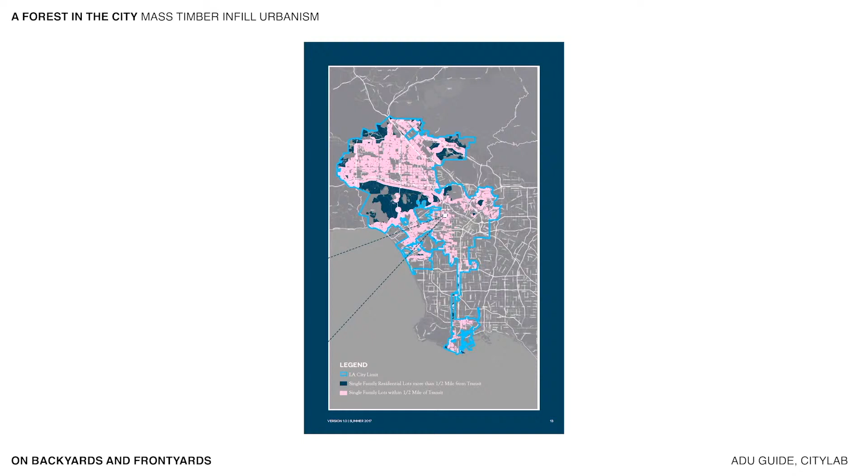One answer has already been extensively explored throughout Los Angeles: the conversion of what was once garage or shed space to accessory dwelling units, now legal throughout California. These backyard homes easily densify and reduce wasted interior block space.

Another strategy involves returning to Dolores Hayden's 1980s collectivization of the suburban block, in which backyards are surrendered as block-wide common space for playing, gardening, and socializing in an attempt to flatten hierarchies and alleviate suburban ennui. Perhaps where Hayden's plan falls short is in the co-opting of parts of existing homes, rather than creating new central structures.

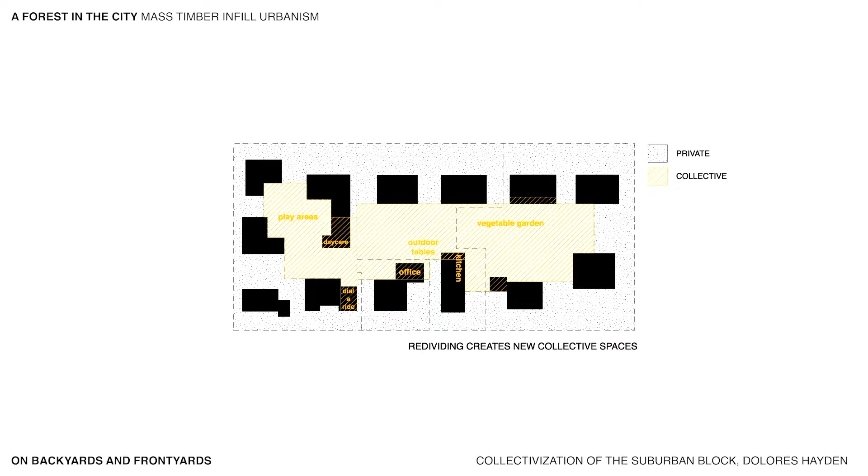Taking stock of every square meter of land within the site validates this interest in backyards and found spaces. The area is relatively dense by Los Angeles' standards, and nearly half consists of low-rise residential buildings. Yet front, back, and side yards, driveways, and the omnipresent parking lot all present ways to rethink moving through and living in this sprawling city.

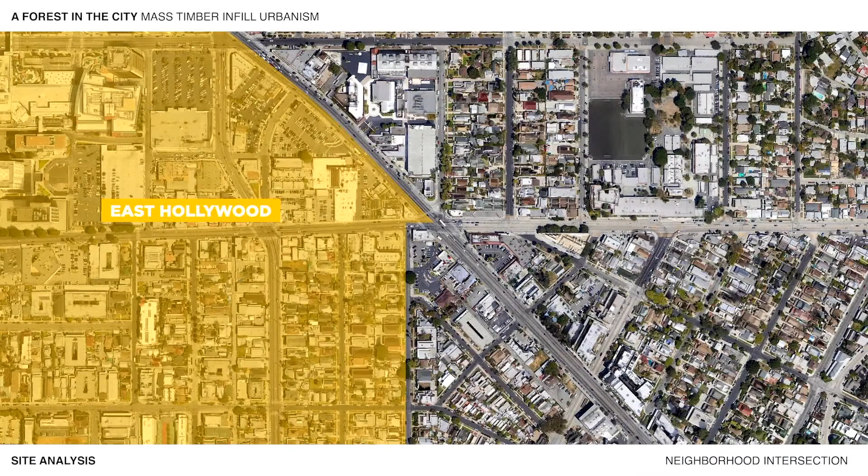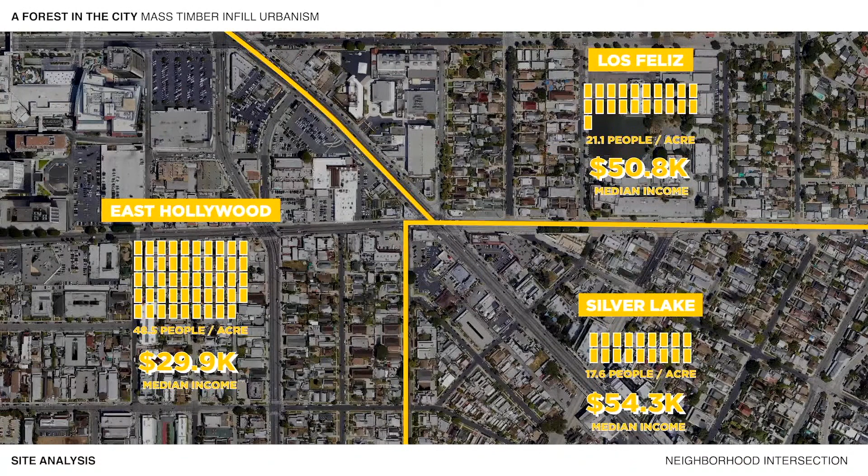This inquiry is centered at the intersection of three neighborhoods: East Hollywood, Silver Lake, and Los Feliz. These three distinctive areas present a dichotomy of lifestyle and domesticity in LA. Predominantly white, affluent residents in Silver Lake and Los Feliz have become the stereotype of the American hipster. East Hollywood, the third densest neighborhood in Los Angeles, is home to young, working-class families. Predominantly Latino and low-income, East Hollywood's density in an otherwise familiarly low-rise neighborhood comes at the cost of overcrowding. A reminder that many of the units coming on market today are not only unaffordable, but too small for families.

The area is not only the intersection of two lifestyles, but also of Los Angeles' two grids: the Spanish colonial Ord grid, oriented to the sun, and the American checkerboard Jeffersonian grid, which slashes east to west to form LA's familiar system of streets and boulevards. This intersection provides unusual view corridors, producing an almost diorama-like urban layering effect. Common moments of lifting, often as casual as a car wash or motel hallway, frame these layered views, creating illusions of unlikely adjacencies between commercial and residential and collapsed typologies.

The project is situated adjacent to the primary commercial corridors along Sunset and Fountain, at the center of the study area. Although this intervention is site-specific, the concept speaks to exemplary conditions for addressing increased density throughout the LA area.

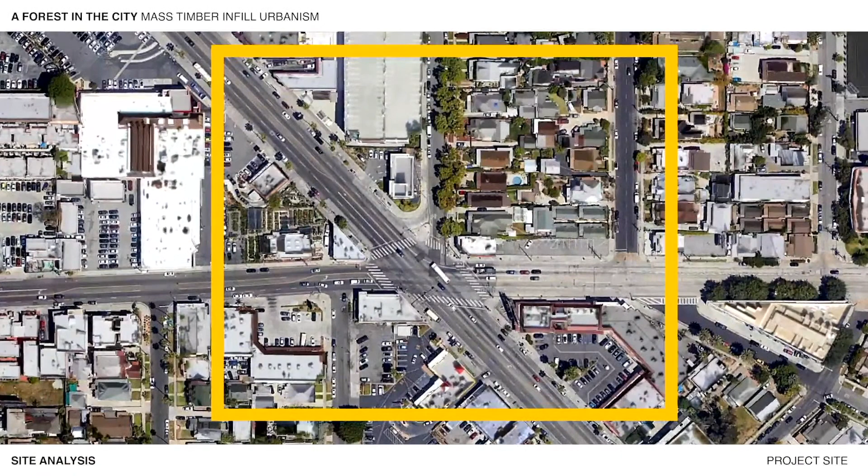Here, a linear strip of surface parking along Fountain anchors further development into the block. This necessitates taking over the backyards of 4 single-family homes on the western side of the block to link 2 linear spaces together for an infill strategy.

The project proposes a 12-story residential building on this site that, despite its narrow footprint, offers a vision of increased density able to accommodate different residential experiences representative of its diverse context. At 11,100 square meters and with an FAR of 11, the building challenges current zoning limitations.

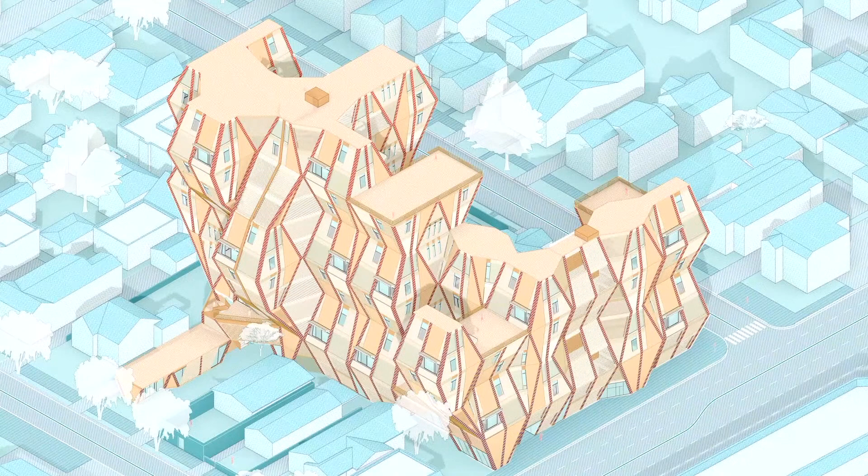This perspective shows the building from Fountain Avenue looking east, and showcases the use of heavy timber framing augmented by wood infill panels and louvers throughout the facade. Exterior expression takes inspiration from the German tradition of Fachwerk. Directionality, offsets, and angles inform the facade as they do the massing.

Programmatically, the building operates in 2 sections. The street-lining front bar houses a series of split-level co-living clusters, while the interior bar contains a more typical mix of 1 to 3 bedroom apartment units, oriented around open-air cores and shared space.

At the ground floor, the project proposes a completely open and public interface connecting the neighborhood to a small public library and exhibition space on the 2nd and 3rd floors.

Beginning from a consideration of growing and branching, the massing and structural logic follows a trapezoidal form, which flips, joins, and merges along set seams.

These organizations provide a mass timber structural logic that draws from the strength of diagonal vertical members bolstered by deep girders, eliminating the need for contiguous central columns.

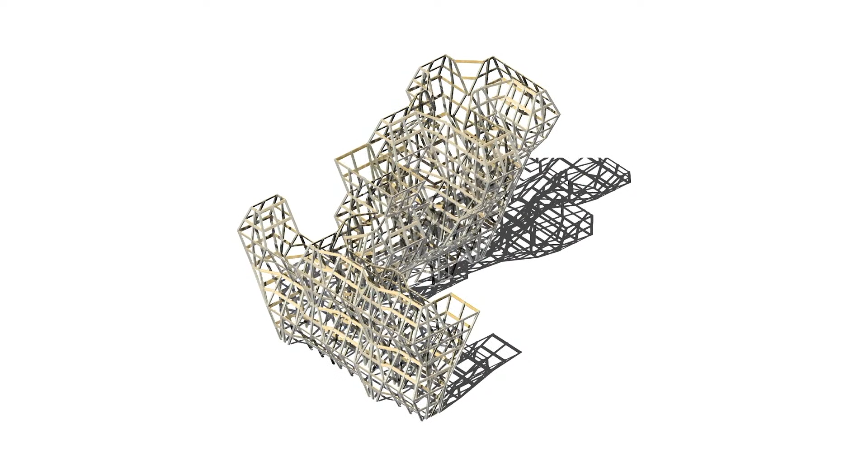CLT floor panels provide further stiffness, and tying back to the CLT cores enables much of the branching and growing, allowing the slender base to support a structure that rises, rather than looms, above its 1 to 2 story neighbors.

This footprint and structure provides a framework to interrogate ways of living. As mentioned in the program diagram, the street-facing bar of the building is home to co-living clusters.

Here, one module houses a pair of dense, split-level clusters. Each is composed of a private, parceled sleep floor connected to an open, social living floor.

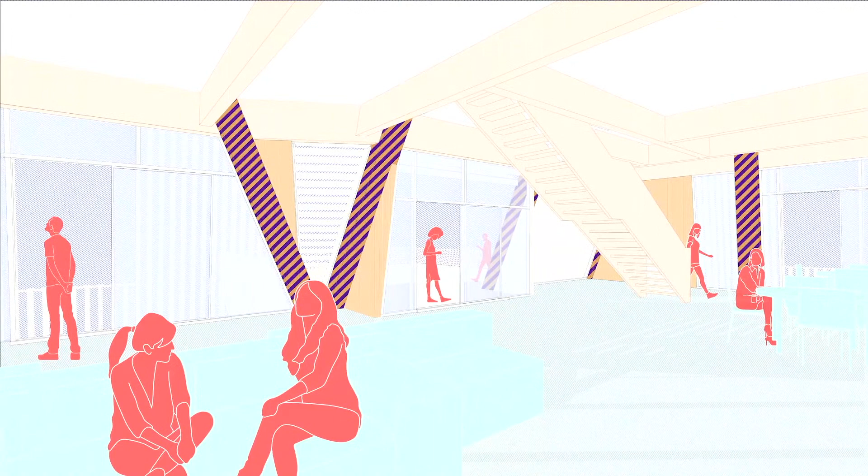Notably, the project does not work with unit minimums. These spaces are designed for family, gathering, and flexibility, thinking aspirationally about the chance for emergence of new collectivized systems of economy and lifestyle.

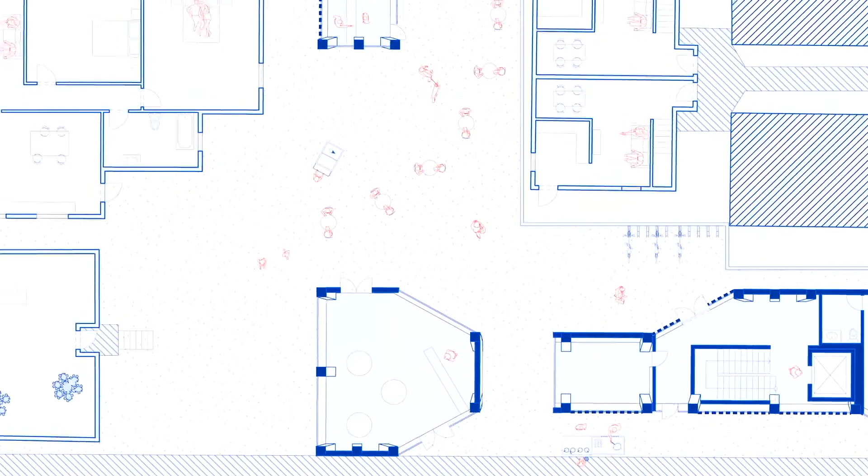This provocation entails a radical shift in notions of sovereignty over urban space. Collectivity and shared experiences are presented as a means of dismantling the unwavering individualism that contemporary urban environments tend to embody and protect.

The project creates a public throughway from Fountain Avenue to Hoover Street, which frames space for 2 residential lobbies, piecemeal retail spaces, and an 80 square meter ground floor extension of the public library at the northern edge of the site.

The proposition of increased urban density put forth by the project as a whole begins in earnest at the ground floor. With only minimal encroachment into existing single-family lots, the overall use of space is intensified for both public and private realms. Communal and open spaces flow up through the building.

A 1,300 square meter library and exhibition space span the 2nd and 3rd floors, while shared open-air circulation continues to serve the various residence types above.

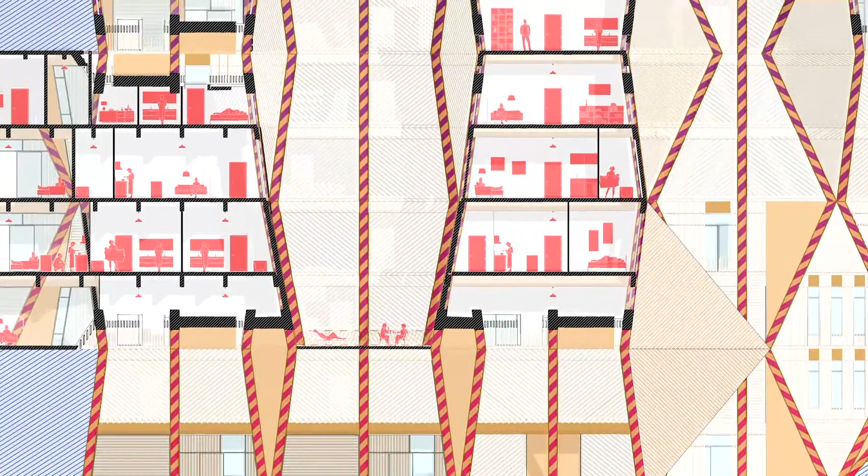The design offers both internal exchanges as well as moments of encounter between the building and its context. Public entrances to the site are characterized by the interface between low-rise residential context and the proposed design, as sharp transitions in height and program are moderated by a near ubiquity of open-air public space.

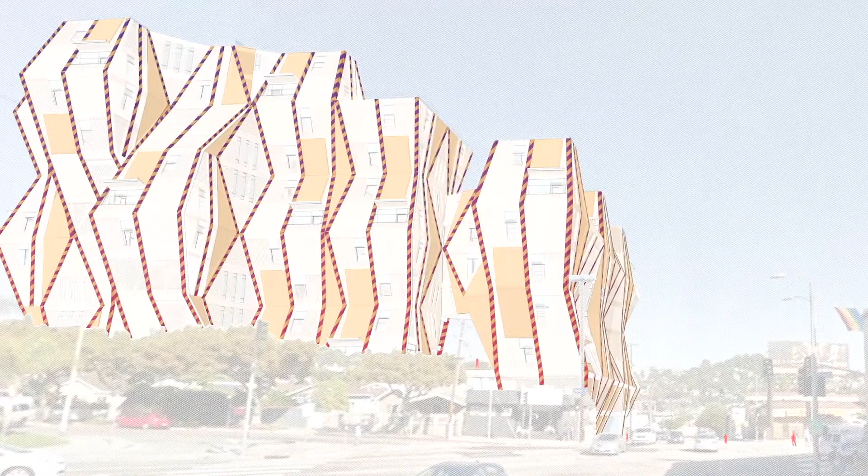In an already decentralized Los Angeles, density can no longer be relegated to certain areas of the city. This design offers an approach to high-rise density mixed with quintessential LA housing typologies, and suggests that we can move forward without losing our past.

Mass timber offers new opportunities for sustainable density, both in construction and living. In the face of a housing crisis and growing anti-development sentiment, this project pushes the limits of mass timber construction to reject calls for modest density, and posits extremes in its approach to density as in its approach to living together.

What I learned from this studio is that what triggers me most is directing the views and experiences of people while moving—how to excite and surprise them, how to make the rides fun.

The central idea for me to engage in mobility is to weld the discontinuity during each transit and to make everything straightforward, including experience. Every time I start a design, I try to better organize the pedestrians and the different size vehicles and try to provide both walkers and drivers an efficient and enjoyable experience.

What I learned this year is to imagine the circulation pattern of how people and things can move interactively in buildings or urban areas.

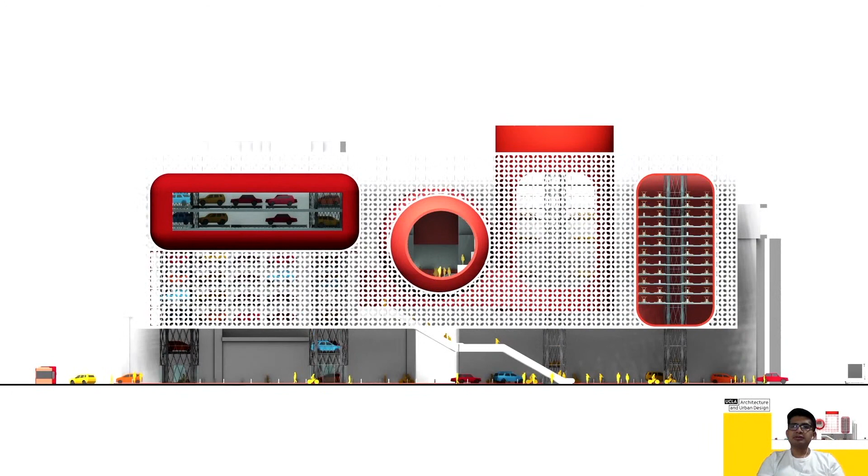This project proposes that the vehicle comes to you instead of you looking for them. The hub is expressed as a vending machine. Vehicles are stacked on the top and delivered to people with elevators on the ground level.

The vertical stacking of vehicles becomes a landmark. The movement of bikes, cars, and scooters on the elevator makes the facade be in constant motion.

The machine is divided into volumes for vehicle storage. They store cars, bicycles, scooters, and one volume in the center is a giant 7-Eleven.

This simulation is shown at rush hour. The vertical stacking liberates the ground floor. For that, the ground floor becomes a grab-and-go place. It is a place for people to grab and drop a vehicle and continue to their destination.

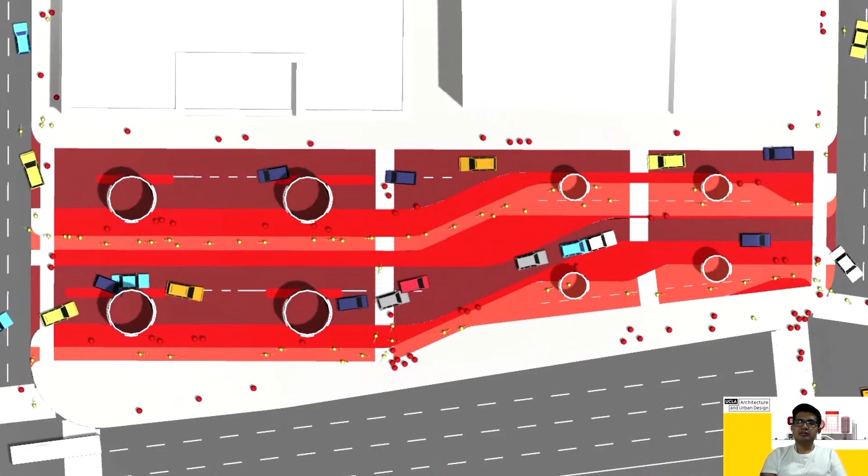The liberation of the ground allows for people to walk freely and for the project to be better connected to the city.

I believe that this project is possible to function today since we can order a vehicle from our phone ahead of time.

This is a shopping and transit experience placed on a busy traffic junction right over the Noho train station.

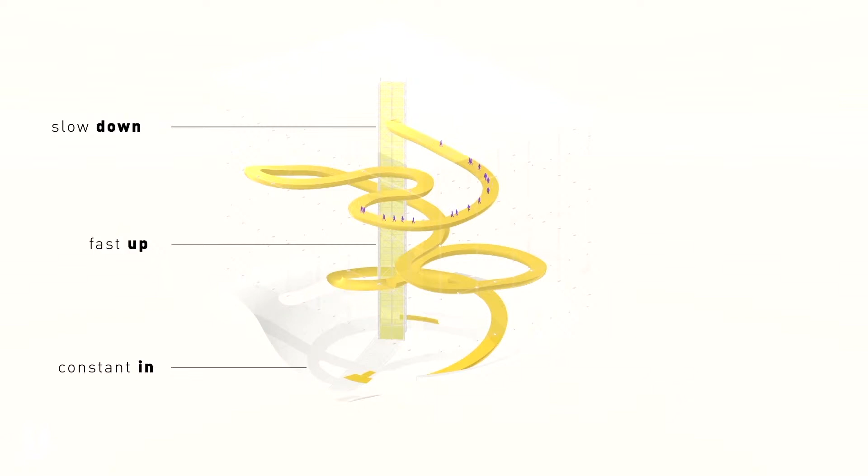The main idea of building circulation is based on a simple logic of launch and slide, replicating a skiing experience with one point of constant flow on the street level, a vertical emitter to the top, and a slow sliding path back to the bottom. This is not merely a movement diagram, but a starting point for creating four distinct spatial experiences.

The first one is that of finding yourself inside a mobility vessel. This bowl-shaped entrance works first like an attraction point and then as a mixer of all the different means of transportation flowing in from the city, penetrating and blending inside it.

Here we will see the trucks that supply the market's back of house that runs on the top of the vessel, cars picking and dropping, grabbing and going, and all the pedestrians and micromobility coming into the site.

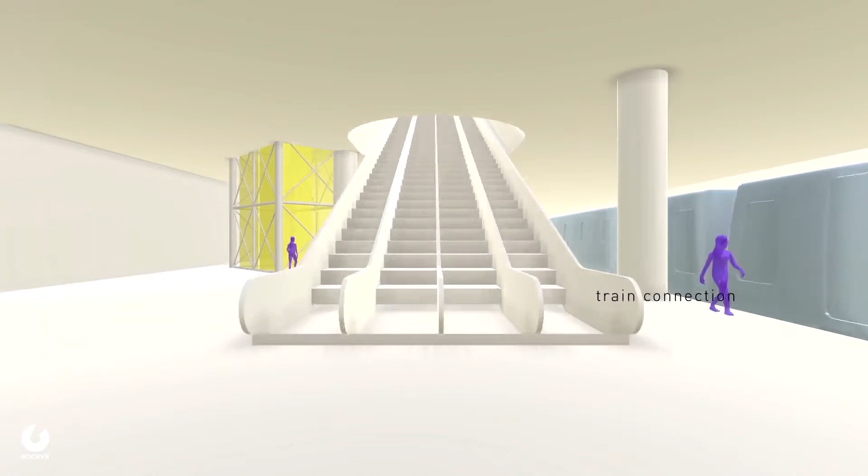The experience starts from the bottom of the bowl, up from the train station, straight into the grab-and-go market, and into the core of the bowl.

Where as you bike or walk or drive or skate, you can always look up and see a floating market hanging over your head, right before you find yourself on the top of the vessel and on an elevated city ground that works as a skate park.

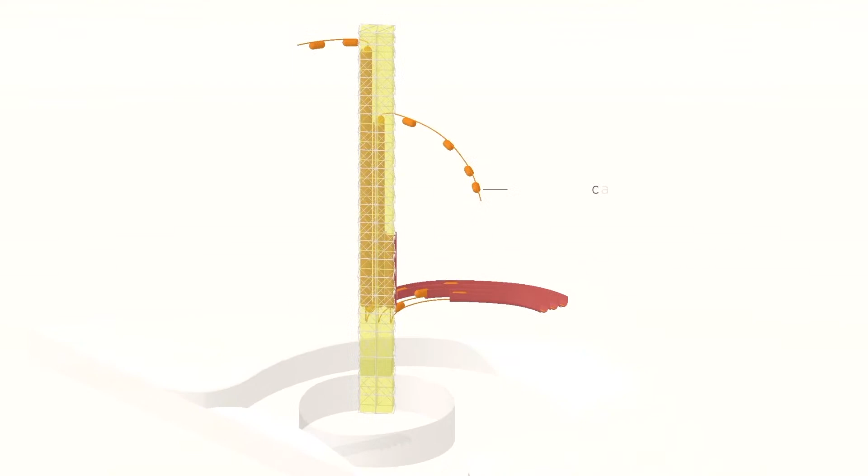Then comes the vertical movement, a binary system for goods and people speeding up to the market, a combination of all views as cutting through and directing at all the different parts of the building all the way to the top.

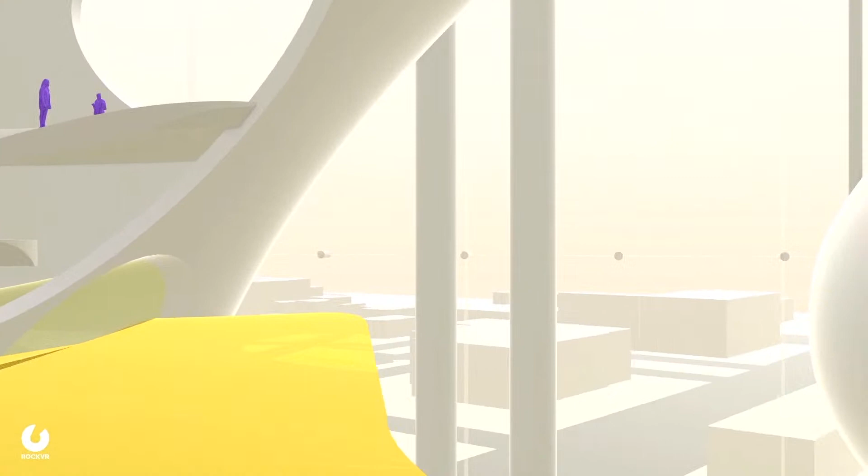From here starts the shopping, twisting and turning on a continuous sliding route to the bottom. And what first looks like an inscription of pedestrian courses on a snake path actually turns into a navigating experience of alternating images, where the 3D space, wide or narrow, introvert or extrovert, sets a multi-speed journey for the visitor.

And now into the shops. Those blobby floating masses hanging over the vessel are actually three different stores sharing a common logic of open planes on a sequence of floors melting one into the other. Here, the vast openings make the views from store to store a constantly interactive environment.

All those experiences, movements, and views will come to be combined on our version of a transit market, one in steady connection and transaction with the city around it.

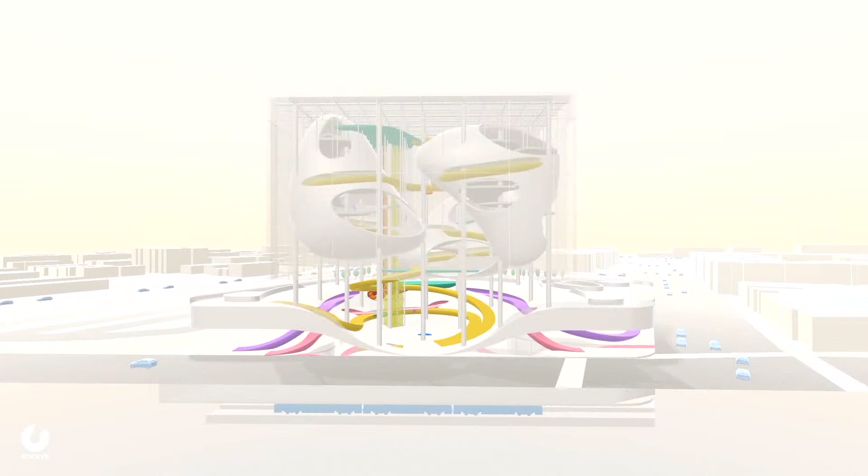This is the simulation of Karnak, and what we learn is that we can use columns to filter different size vehicles. Next is the plan view of the whole market, where we can see buses, Ubers, and different kinds of vehicles going through the market. Next is the simulation of how cars, micro vehicles, and Ubers move through the site.

This is the precedent of our market. It has continuous space horizontally and creates a rapid changing experience vertically. We believe such an experience would be great for a market, so in our proposal we translate this 2D plan into a 3-dimensional market space.

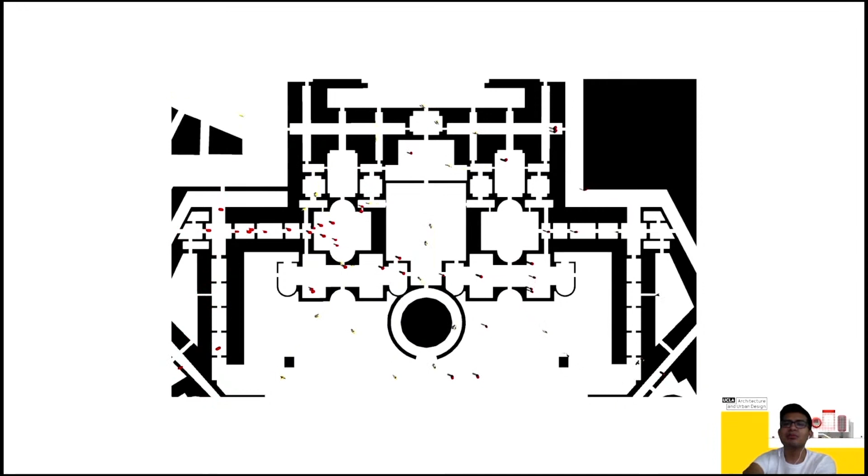We grab elements from Piranesi's Campo Marzio, such as courtyards, enfilades, and hallways, to design the Campo Marzio village. In Campo Marzio village, people move from courtyard to courtyard. Pedestrians and light mobility are allowed, with pedestrians moving through the enfilade spaces and light mobility moving through the hallways.

In this project, people experience spaces in four ways: in the 13th century BC, visit Karnak Grab and Go; in the 20th century, La Villette Market; in the 18th century, Campo Marzio Village; and in the 21st century, the Mobility Highway, which wraps around and becomes the connection between the spaces.

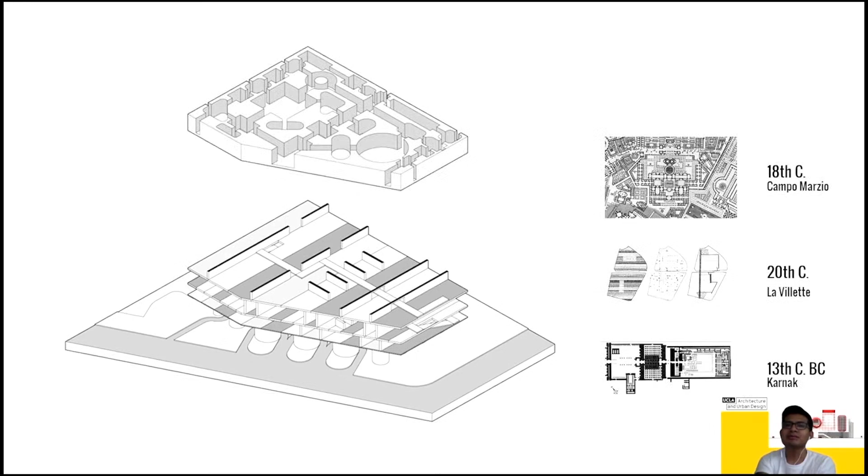In this video, we'll take a tour of this building. The Karnak Grab and Go is on the ground floor. It works as a sponge, attracting people from buses, cars, micromobilities, and the subway train. We use different columns to define the space for different kinds of mobilities.

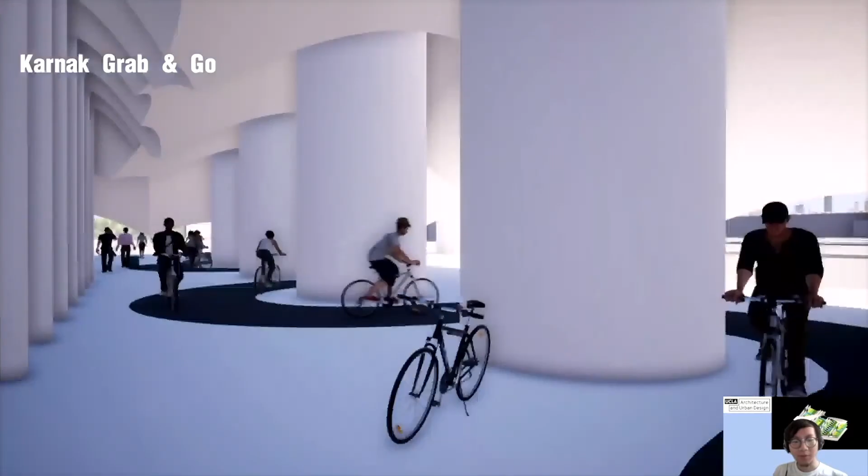People go up by the mobility highway. It is the connector of the three markets in terms of form and circulation.

Now we move to the La Village market. Along the short side direction, each store is a unique, complete, and independent shopping area, but you can keep jumping from one brand's world to another quickly through the bike lane.

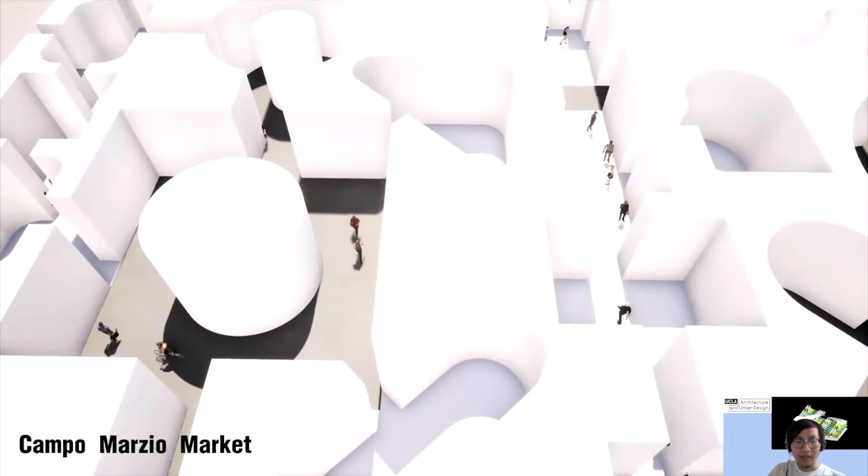Now we are going up to the Campo Marzio market. It is like a shopping village. There is a path for bicycles, and the other paths are for pedestrians only.

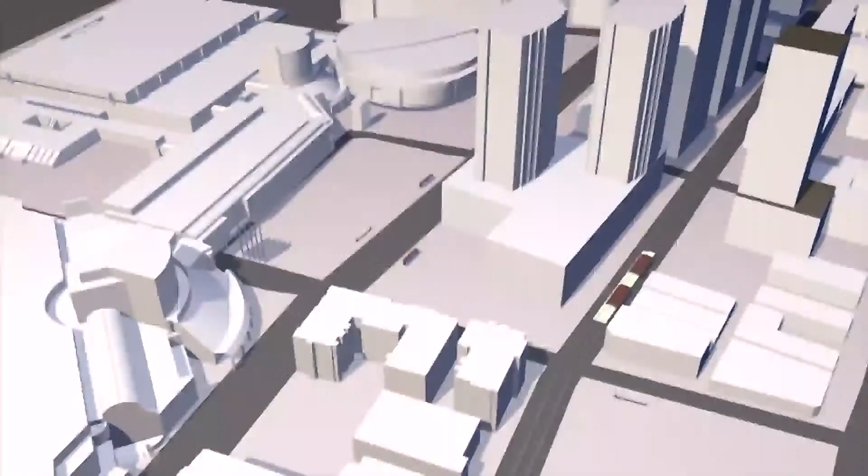The site is located in the South Park neighborhood of downtown Los Angeles. There are many attractions here, such as the Staples Center and Convention Center. It has many different modes of mobility, like the Pico Station, bike sharing, scooters, and bus stops.

There is an aerial platform and vertical connections to the ground. There is a family of vertical connections that serve as transportation and parking places.

This project seems like the High Line Park in New York. This Skywalk doesn't just work on its own to encourage people to use micro-mobility, but it could also activate the grade-separated crossings in Los Angeles built in the 70s and 80s.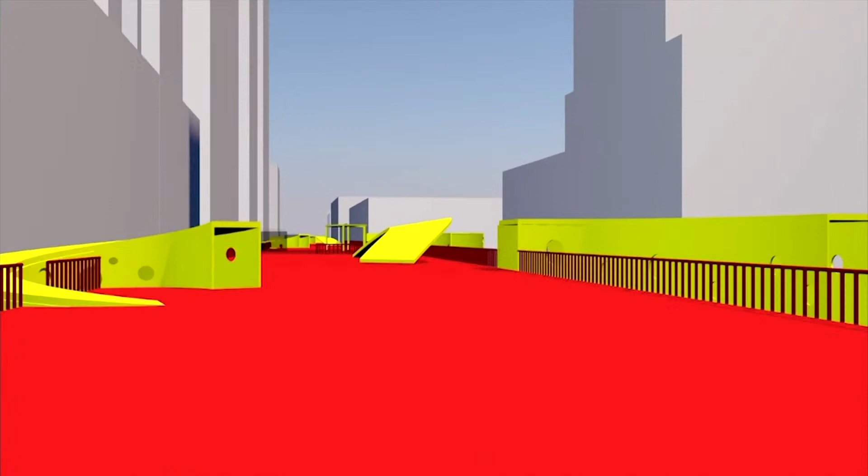This simulation shows how this Skywalk works during a whole day. This aero platform connects with different mobility and attractions, so that people can reach their destination directly or transfer to other places with the help of micro-mobility, solving the last one or two miles traffic problem.

It puts different mobility on the same surface. What we could see is a spectacle of people doing things on the surface and spectators watching it at the same time.

The studio between architecture takes as its main concern the capacity of the section to move beyond the serial stack, and instead to develop complex spatial propositions for nesting together a parking garage and a gym.

In his article, Successive Architecture, Preston Scott Cohen writes: 'Gridiron urbanization led to what is still to this day the most pervasive governing spatial principle of architecture, vertical succession, the unartistically considered, non-hierarchical piling of discrete horizontal slabs of space, one atop the other. Vertical succession relegates the architect's role to designing facades and interior surfaces.'

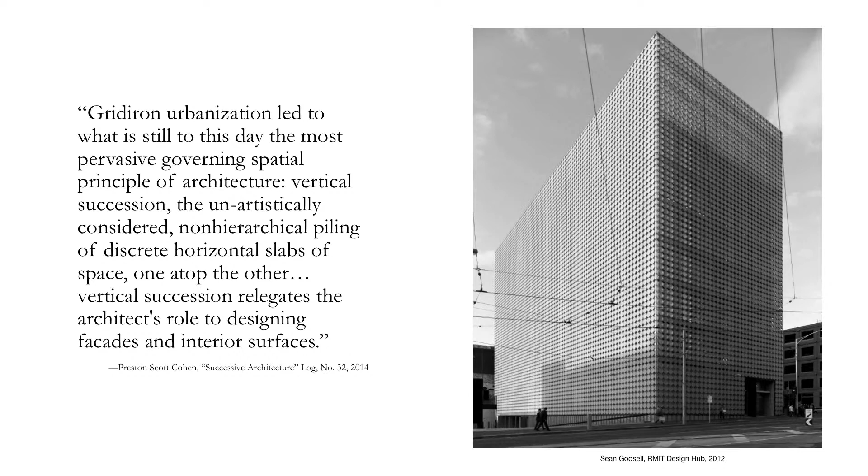This dissolution of sectional hierarchy and the subsequent relegation of architecture to tinkering at the edges points to a series of problems that are at the heart of this first-year core studio—namely, what can a section do, and what, if any, is its relationship to the elevation?

In this studio, we look to the section as a place of great intensity that could dislodge expected relations between parts, as well as expose and choreograph alternative sequences and organizations of view and action.

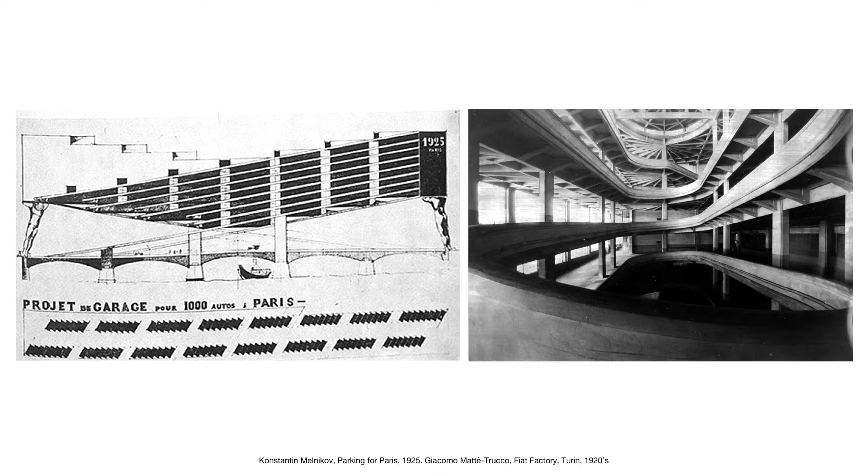With this in mind, we focused on the section's generative orientation in architecture, rather than strictly seeing it as a post facto analytical instrument. In an effort to immediately challenge and interrogate the limitations of the stack, we began the studio by engaging a parking garage as an incitement for the development of a sectionally charged proposal, paying particular attention to 4 parking types: straight ramps, ramp floors, split level, and helical ramps.

While at first glance the organization and circulation of cars in a parking garage may seem a banal and burdensome coordination of metrics, turning radii, numerical capacity, structural spacing, the arrangement of cars offers an immediate engagement with sectional motivations. In this sense, the parking garage is understood as a kind of sectional ready-made, preloaded with stubborn logics and formal resistance, against which an architectural proposition could be forwarded.

In lieu of a precedent, we endeavored to understand and tame the highly specialized workings of parking garage structures and their discrete typologies, finding that once the basic parameters of parking were understood, a great range of possibilities became apparent in the choreography of ramps, slabs, stacks, splits, and spirals.

At a large scale, parking provides a coarse sectional strategy that dislodges the serial flat plane as a given datum of a building while remaining adherent to the necessities of movement and use. It is these qualities of the parking garage, its prescriptive limitations as well as its potential exuberances, that we imagined as the fraught datum against which a second set of concerns might take root.

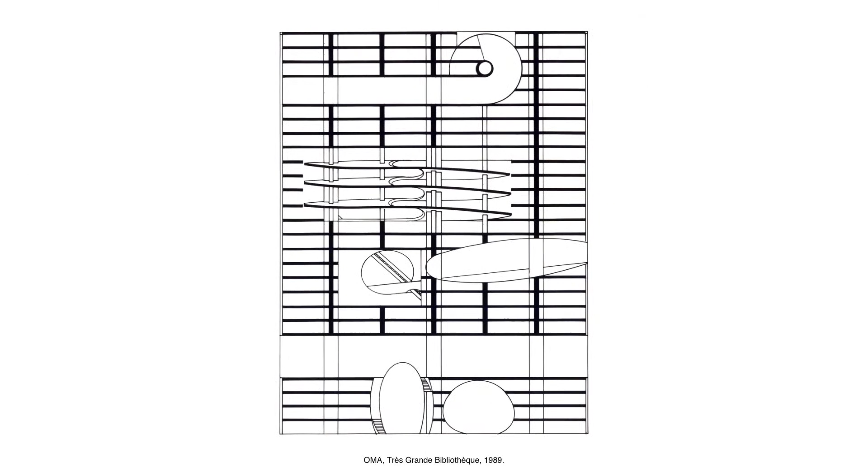As architecture is rarely allegiant to a single set of concerns, the forces that motivate the arrangement of spaces are always multiple and rarely straightforwardly resolvable. In part 2 of the studio, we introduced a secondary set of programs, which operate at a different sectional measure.

That of the recreational gym, with its specifications for wet and dry zones, small and large activities, as well as its rituals of use. Rather than consider these two programs as merely coexisting side by side or above and below, we imagined an opportunistic intermingling of the two.

This expanded set of considerations of scale, volume, organization, and movement was interpreted in each proposal as complementary, oppositional, or otherwise with the initial parking structure, and necessitated an architectural proposal that could manage both propinquity and juxtaposition.

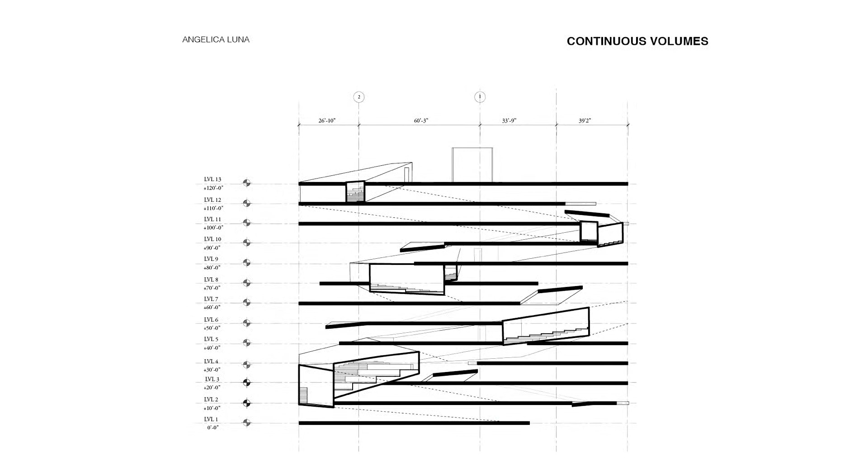As the demands of the brief required an extended distribution of parking and gym in section, so too does each proposal require an approach to continuities and discontinuities in sequence and movement.

That is to say, a considerable amount of pressure was placed on developing a strategy of organization, and then to develop a strategy of circulation that could advance the spatial ambitions of each project while establishing coherence and legibility for use.

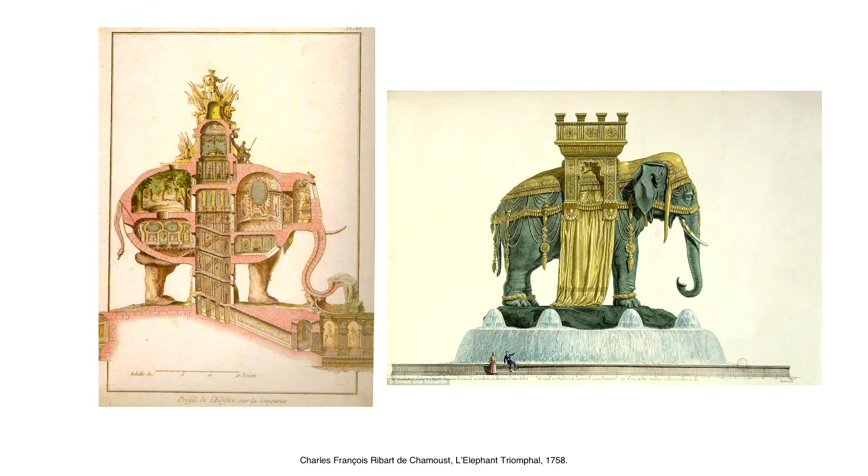Finally, in part 3, the internal struggle of the constituent parts within came to bear on the elevation. Here the section's hidden nature, its knowability revealed only through the projection of an abstract cut, helped us position the range of operations afforded by the outward-facing and immediately available elevation.

That is, just as the section cut reveals, the elevation conceals. In the end, the elevation is what we see, the outermost surface of an enclosure, whether inside or out, its insistent visibility masking whatever ingenuity the section might have lying within.

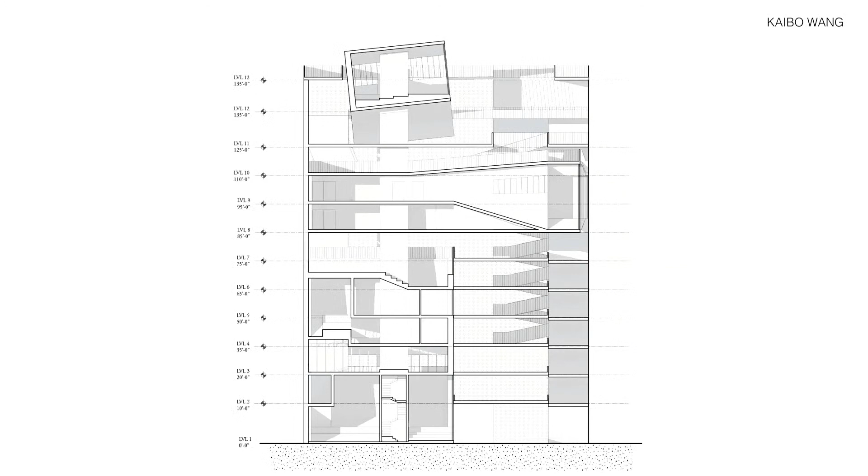Working on a tight infill lot in downtown LA, the proposals finally confront the regulating lines of the city, setting the internal workings of the building into tension with the exterior and provoking a discussion on insides and outsides, their modes of production and reception, as well as their respective allegiances.

Between what is revealed and concealed, what is read and what is experienced, this studio asks how working in section differs from other ways of seeing architecture, what it makes available and by what means, and how we might consider the section's connection to what is finally revealed at the elevation.

In my project, I was interested in exploring the ways in which an envelope could articulate the various edge conditions of the interior, and how this would in turn result in different atmospheres, questioning the physical forces of the building.

In search of a non-repeating stack, I explored the effects of rotating and truncating slabs. The result led to every floor plate being unique, establishing individual relations between parking and gym on every floor. Such led to various spatial organization in which small programs and core became nested within larger ones.

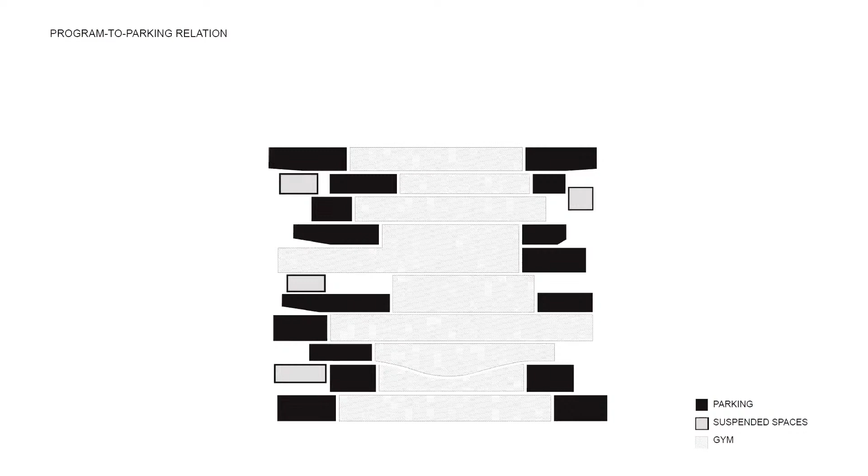This also led to an opportunity found between the slab edges within the voids, allowing for spaces to be suspended. In terms of organization, the parking circulates around the gym. Gym programs requiring less light and shorter durations are located on lower levels.

Vertical circulation consists of two stairs: one fire stair that aligns to the orientation of the slab, and one external stair that connects to the suspended spaces. The framework acts as a puppeteer of the slab, articulating the push and the pull of the interior space by controlling the slab's movements and gestures. It also acts as the mediator between the section and the elevation.

I was particularly interested in the relationship between the section and the elevation, specifically regarding their appearance to the street. In this case, the light framework, which holds and articulates the outermost skin, gives the appearance of structural instability, whereas...

the deep interior slabs give a sense of solidity and mass. The envelope thus takes on the role of instability, tightly wrapping the framework and its content, revealing its hard interior, whilst also disorientating the height levels with its sails.

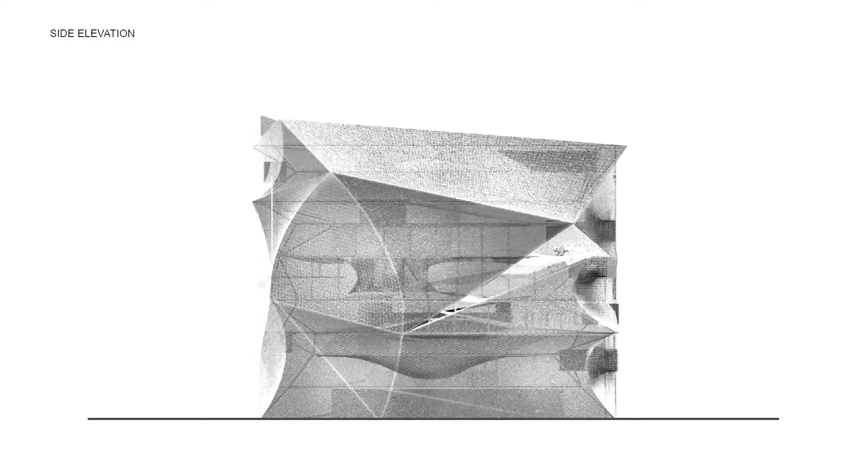The openings, crossing diagonally through multiple floors, reveal extroverted moments within the building. And the suspended spaces become a pièce de résistance within the program, pushing back on the envelope. The party wall highlights the descending scales geometry.

Within the section, one begins to see the relationship between the physical forces pushing and pulling the section and the envelope. On one hand, the degrees of curvature within the envelope give an outward expression of the interior voids and the rotation of slabs. On the other hand, the mesh is interrupted at moments where the slab approaches the perimeter.

The exterior enters the interior, creating moments of double enclosure in which the second layer refines the articulation of the rotating slabs, highlighted by the tensile twist in the mesh.

The program and envelope thus begin to merge, as seen where the pool appears to be carried by the mesh and hung from the framework. The mesh thus also takes on the role of banisters, trapeze, and trapeze safety nets, thus beginning to act as thresholds.

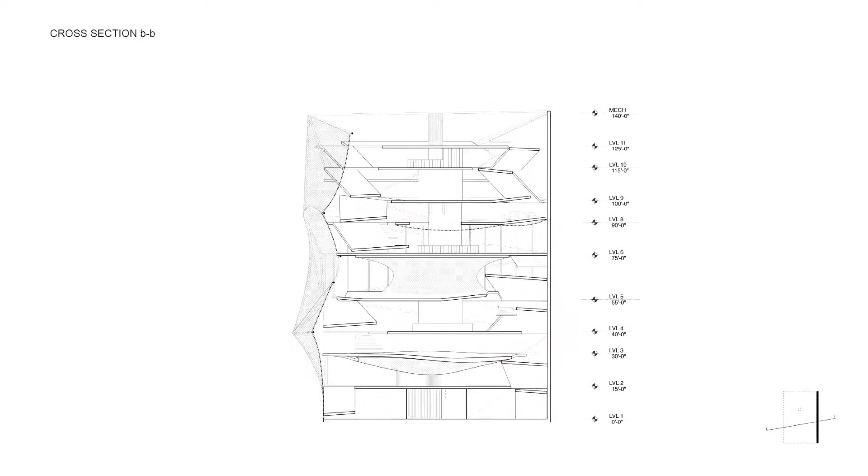The cross-sections highlight the atmospheric voids created by the ramps, alternating from one-way to two-way systems, setting a tone expressing a change of rotation of the slab.

The plans carry equal significance to the section and elevation. They demonstrate the atmospheric implications that arise from the framework puppeteering the slab. On the third floor, for example, the slab has adopted a sense of elasticity in which its corners are being pulled by the framework, and the load of the water then deforms it.

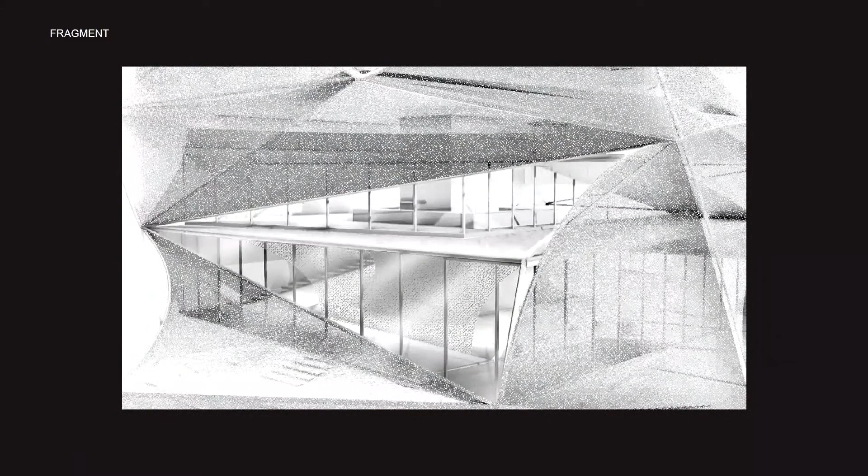Ultimately, the project aims to question the physical relationships between the slabs, the frameworks, the envelope, and its suspended spaces, leading to atmospheric qualities. The envelope almost punctures the interior, thus nearly becoming the program, as seen here in which it transforms into the trapeze safety net.

Although the suspended spaces are the pièces de résistance and physically push back on its envelope, from the interior it was designed in such a way to question whether it is pushing back or whether it is simply being sucked in by the envelope. Ultimately, that is what this project is about: questioning whether the section controls the elevation or vice versa. However, this is only achieved by establishing the section as a stable controller to which the envelope surrenders.

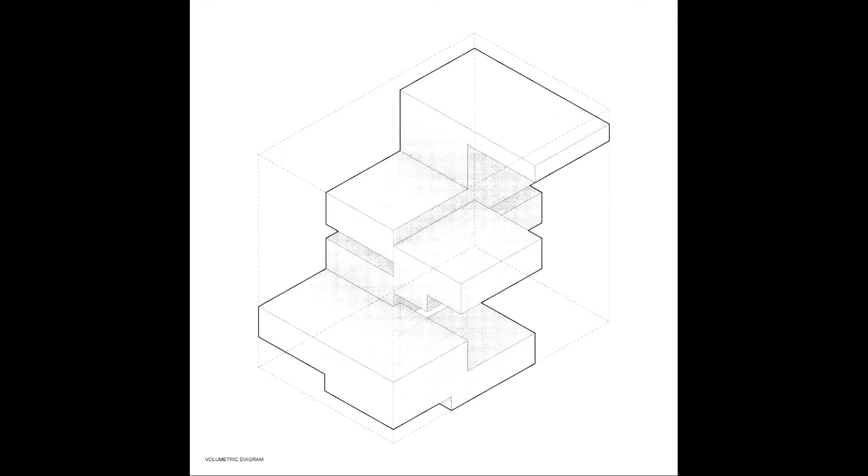This studio is about a rigid system of parking coexisting with a nuanced program to develop section, utilizing helical ramps not for their figural properties, but as an organizational device which allows for vertical movement. This device is the catalyst for making deep sectional space and allowing a sequence to emerge in the organization of the section.

This project attempts to reconcile what is an urban streetscape, wrapped and packed into a dense container in an urban infill condition, and it is the helical organization that allows for this. It is taking an urban landscape, complete with entourage, and folding it into a box and moving it vertically through a logical sequence of occupation that relates to and allows for an emerging organization of programs.

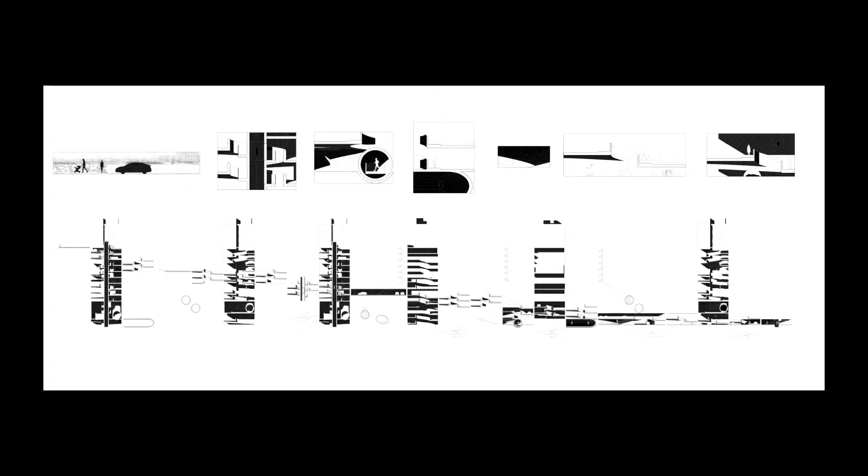The experience subverts the urban landscape and creates new ephemeral, atmospheric moments. Spatial experience where it becomes about producing nuanced moments.

Moving through the space from scene to scene, secondary elements of circulation - vertical stair and tube - start to subvert that organization and produce yet another environment that allows for a short circuiting of that urban condition, delving deeper into the section.

This project seeks to blur the boundary between representation and architecture, where graphic becomes the impetus for developing actual physical features at the level of facade. Representation is also the device that renders complex spatial conditions deep within the section.

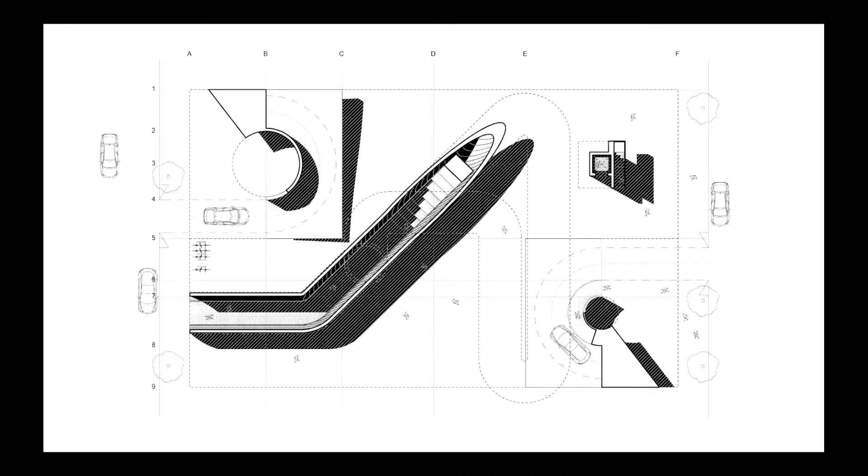In plan, it's possible to read the tail of the helix twice at the ground level, once as the entry point vertically, and once as the point of exit. The tail occurs 3 times at other levels, facilitating upwards or downwards circulation.

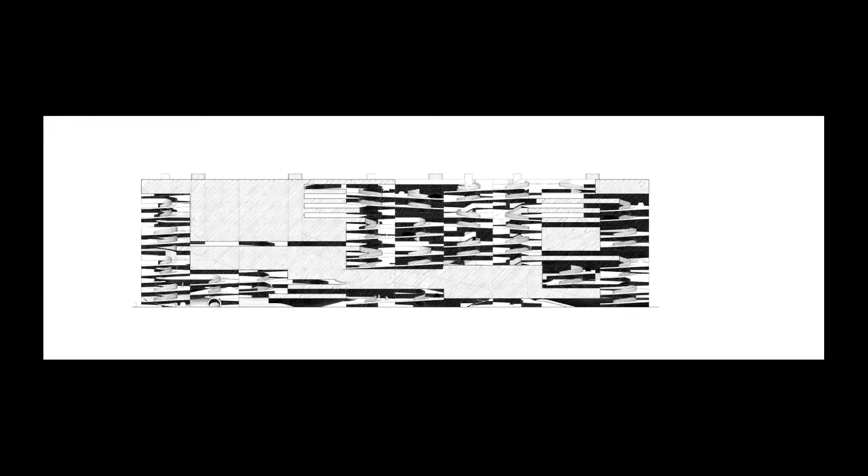The tubes make a presence as an interruption of that sequence, stitching together multiple programs of parking and gym vertically. In closing, elevation serves to suppress the section in lieu of continuity of program at the periphery, and in other instances reveals the section as the moment of intensity deep within the building.

People move through space with different cadences, creating different patterns with different intentions. What dictates these flows? This project examines how a surface gives rise to movement and how a surface is informed and reinformed by movement and use.

A control curve informs the slab, which informs slopes and ramps of various inclines, giving rise to various types of stairs. The stair then informs human flows and activities. The original control curve is not static.

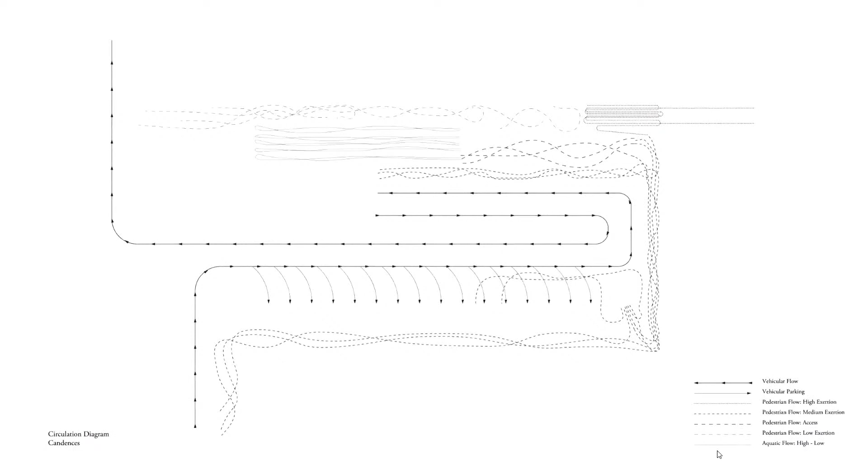It evolves as it yields and adapts to the program. Changes in inclines give rise to program. Change in incline indicates a change in state or change in program. Slope and program resist each other and inform each other.

The section is a consequence of slope and program. This project examines how tectonic surfaces push back on the human body and influence behavior and movement through space. This gym does not contain standard exercise machines.

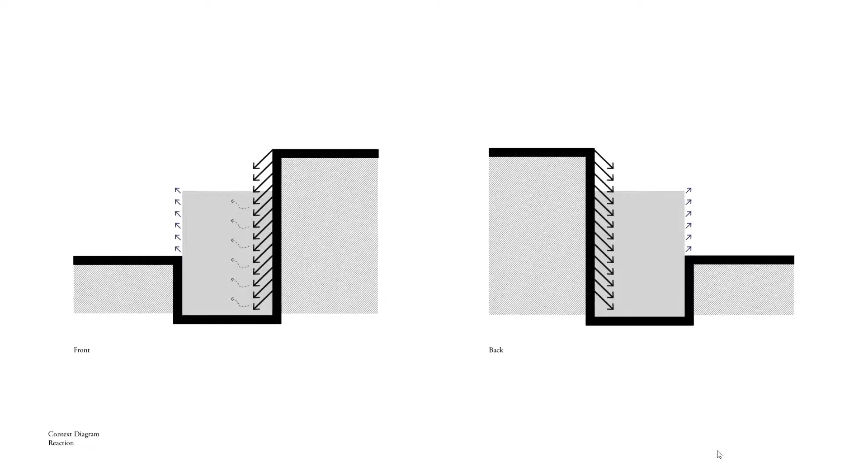The project is located on an infill site in downtown Los Angeles, and the proposed building reacts to those on either side of it. The section, through slope and stair, communicates program and activity within the building.

Through variation in slope, the section reveals levels of resistance and exertion. The transverse sections, unlike the long sections, reveal primarily linear circulation across the slab from one program to another.

Slab slopes and curvatures are tuned to the different cadences of vehicular and pedestrian circulation through space.

The elevation responds to internal conditions by indexing thresholds, concealing some programs while exposing others. The elevation operates at two scales: the horizontal, fine-grain, highly calibrated, acting locally, and the vertical, coarse-grain, acting globally.

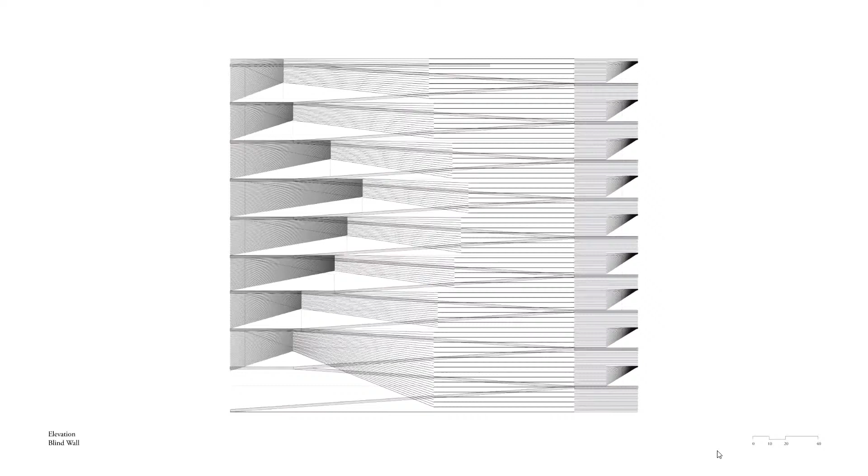While the transverse and long sections translate program and activity differently, the elevations remain contiguous around the building, tracking state and behavior changes within.

Cables diverge, converge, and bunch in response to internal programmatic conditions in order to create transparency, translucency, and opacity. Exploring further the potential of a cable screen system, the elevation alters cable dimensions in response to programmatic shifts.

The figure ground indicates sections of the facade which are opaque, transparent, and translucent.

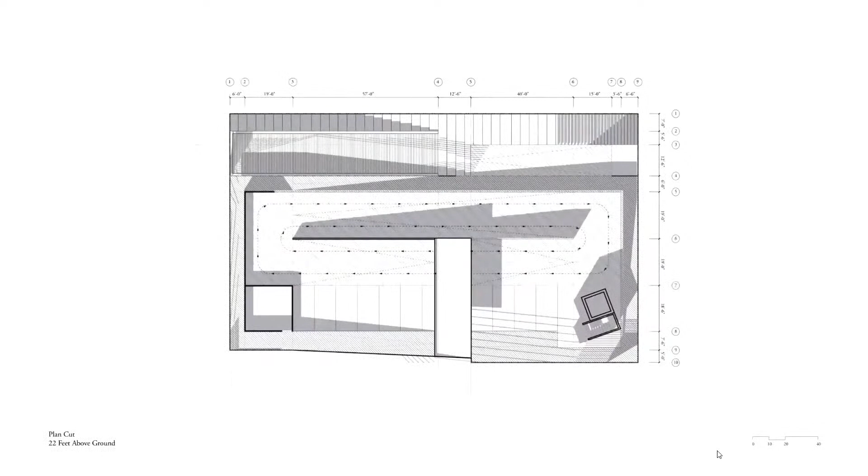Thresholds are defined by a change from horizontal surface to inclined surface, by a change in degree of incline, and by a change in stair type. Thresholds indicate a change in state or a change in behavior and are defined by surface tectonics.

Shadows in plan from the elevation screen produce effects that correspond to programmatic states. These shadows both react to interior program and influence it.

Architecture is often faced with the task of bringing together two often diametrically opposed entities. Combining a gym with a parking garage seemed one such pairing.

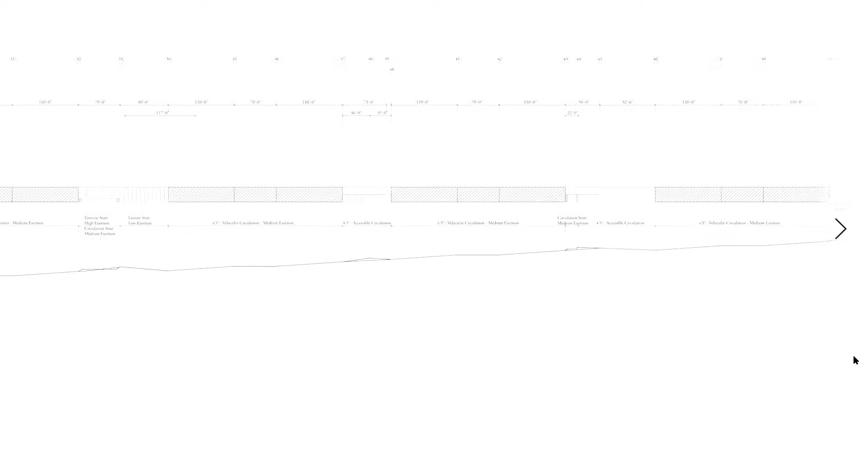This project examines the subliminal interferences caused by sloping surfaces in the production of behavior suited for both programmatic conditions. These interferences manifest as resistance on the human body.

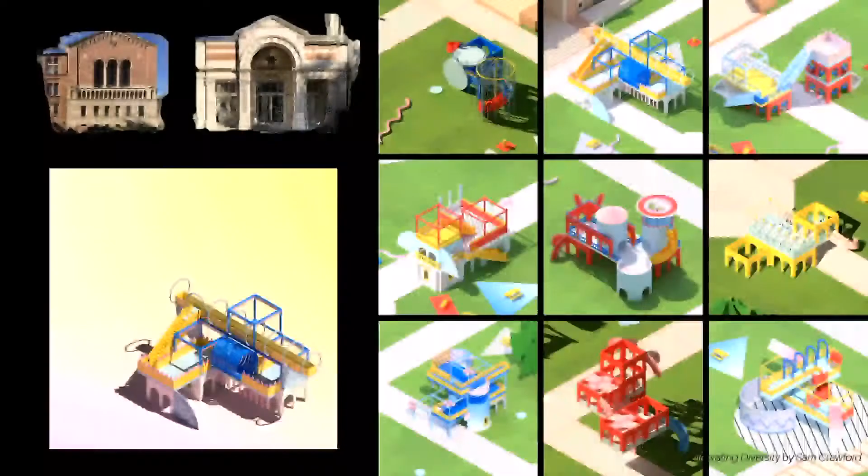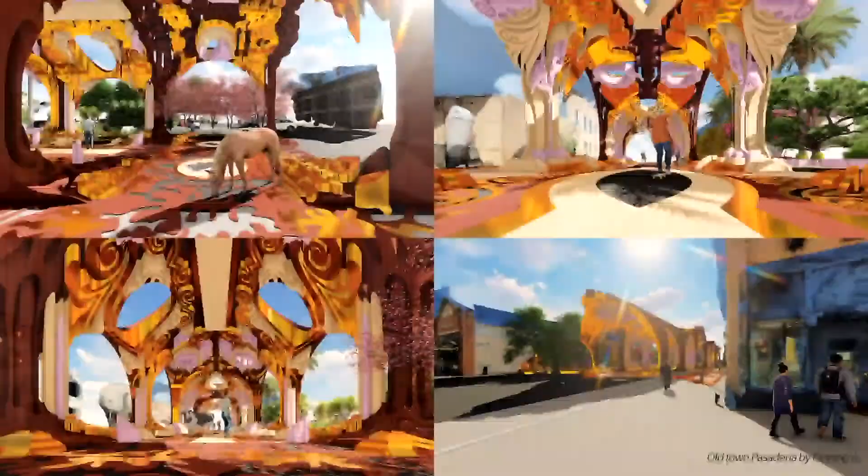And research becomes a search where we scroll through infinite TikTok videos, Instagram posts, YouTube channel live streams, and other interfaces where LA's identity is portrayed and celebrated for all their glorious messiness, where discussions around architectural styles and genres turn into digital material filters and augmented reality add-ons, where aesthetics is bound to cultural identities and neighborhood borders politics, where economics and social systems have a direct physical impact manifested through their aesthetics.

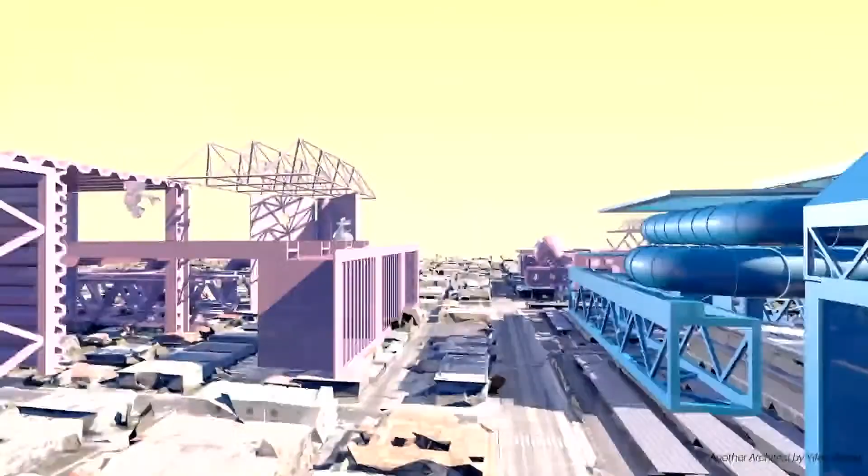The theoretical framework is based on Karsten Harries writing on the Bavarian Rococo, more precisely on the architectural element of the cartouche, the architectural boundary meant to frame one realm from the other, to divide the divine from the profane, finds itself broken. We don't know if the putto is part of the pictorial realm or the three-dimensional stucco realm. The framing device itself was meant as a boundary, an edge, and it's completely dissolved. The cartouche, the frame, is broken.

We are interested in architecture as a visual apparatus. We believe that architecture's most speculative proposals come from ways of looking at things, perceiving, seeing, and we will design with these multiple layers of representation, learning from the Beaux-Arts understanding of the act of rendering through the usage of words like entourage, mosaic, and poché, in order to understand their evolution and speculate on what they have become today.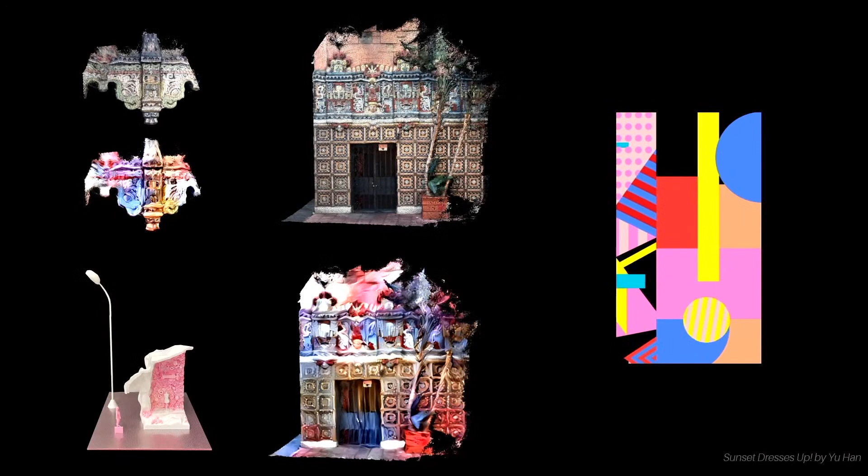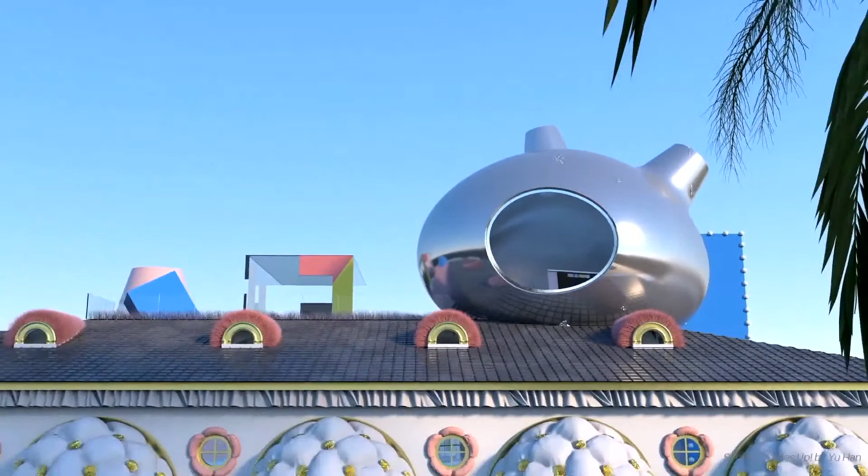So we documented these neighborhoods through the use of photogrammetry, working from 2D images using convolutional neural networks for image style transfer, then moving into 2.5D using photogrammetric technique of bas and high relief, then to 3D, producing a Cabinet of Curiosity to finally arrive at the fourth layer, the 3.5D, with the production of moving images through GIF and narrative storytelling, redefining the Bavarian Rococo frame from 2D to a fully 3D immersive and inhabitable frame. Our conversation questions the expectations of architectural research, the standardization of drawing representation, and rigid historical canon.

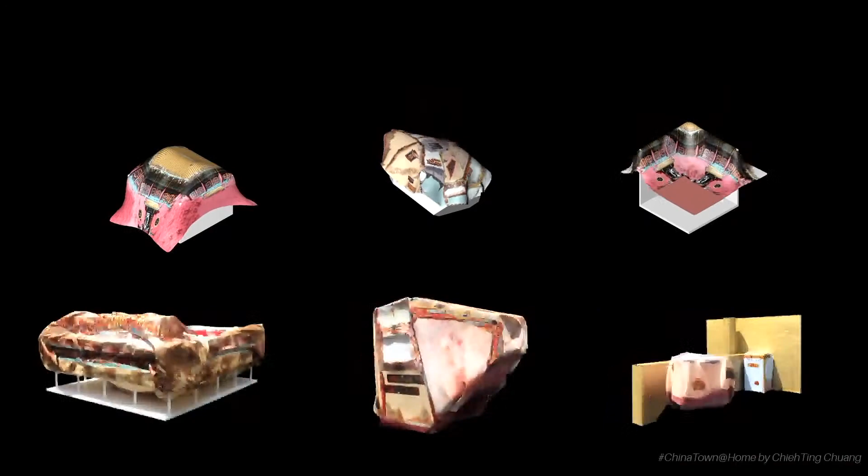Each designer has developed their own workflow, language, and position associated with their specific neighborhood. Los Angeles Portraits is an invitation to open a discussion on space's identity through various means of searching and registering them. We speculate through ways of seeing on possible stories for Los Angeles Portrait.

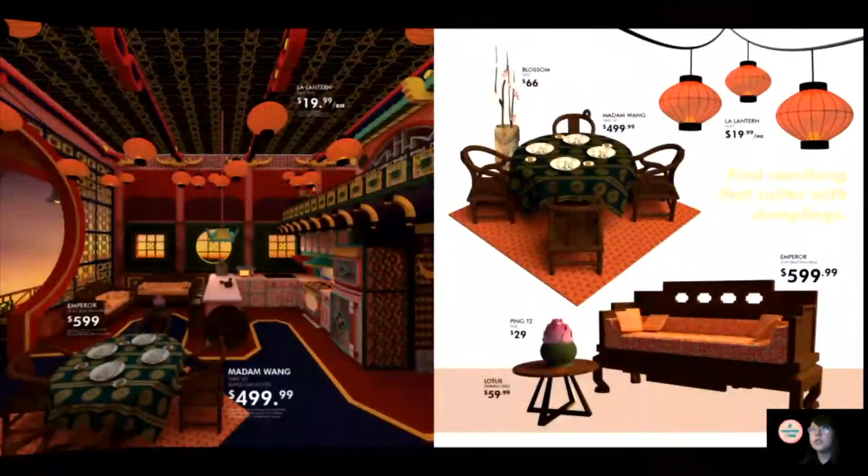Here is a review from a YouTuber of our product.

Hello everyone, welcome back to JT's channel. Today I'm going to play this game called Chinatown at Home. I haven't played it before, so this is my first time. I hope you guys enjoy this video. On the left of the panel, there's edit tools. On the right, there's a pull down menu for furniture and objects. I already 3D scanned my room yesterday, so it looks really clean right now. You can also choose from the template. So let's start with adding some windows and doors. Ooh, this door looks fancy. Is that a chicken? Oh yeah, it's a chicken.

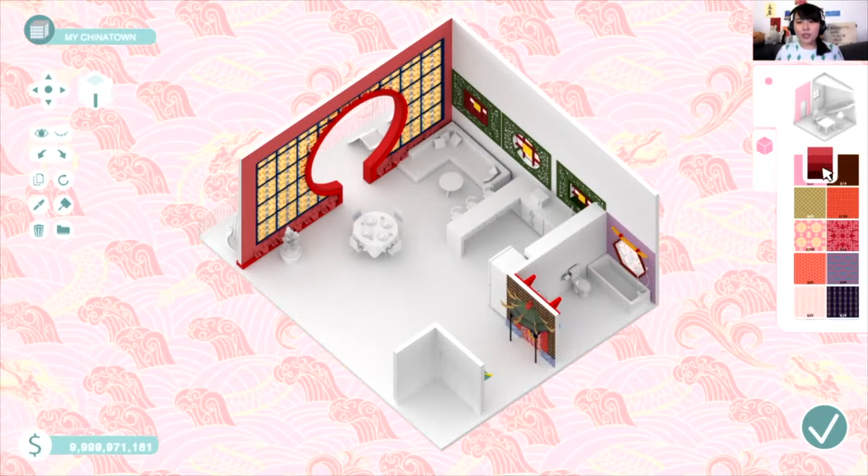Okay, oh, that's a big window. There's a lot of collection of wallpapers. They look really cute. I really like that purple one. I'm going to add it here. Here's some wall decorations, add some here as well. More on the wall. Adding stairs, handrails. There's a lot of furniture and objects. Ooh, this fish looks super cute. I'm going to put that in the bathtub. Nobody's going to shower anymore. I really like the kitchen appliance. Everything has small roofs. Look at that microwave. It's just super, super cute.

Okay, oh, that's the Buddha. I'm going to put it here. I think there's a lot of objects that are really weird, like this wall mounted lion light. Okay, I think we're almost done with the first floor. Let's add some furniture on the balcony. Okay, let's decorate my bedroom now. Oh, look at this bed, it looks so nice. It looks like a house in a house. I would definitely sleep in that. Okay, I think it's getting really, really cool. Let's add the balconies. Oh, the lanterns. I really like these lanterns, like real Chinatown lanterns. I'm gonna add a lot, I'm gonna add some here as well, and here. Okay, we're done.

We have a lot of money left. Okay, let's look around. It's actually super good, I think I'm a genius. I'm getting this, I'm killing it. I'm the best Chinatown builder. Okay, I'm excited, let's see what it'll be like in real life. Ooh, now we're in the house. This is the bed, let's go downstairs. Ooh, it looks really weird.

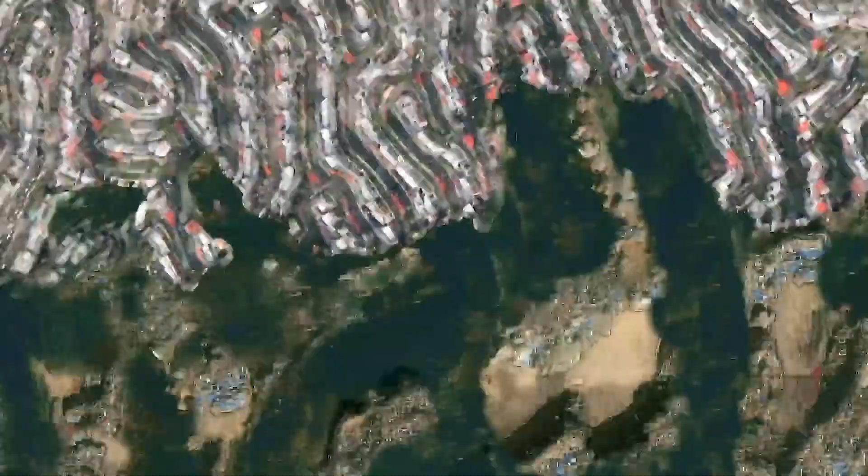E-waste city. The world dumps its electronic waste into sites in developing countries in Africa and Southeast Asia, creating toxic working conditions for the inhabitants tasked with recycling these parts. Southeast Asia is projected to be largely underwater due to massive sea level rise, which will lead to massive migration and economic collapse. E-waste City proposes the formation of a brand new urban development located in the vicinity of Phnom Penh, designed to process the entire world's e-waste.

Based on the linear and organic formation of a reaction diffusion pattern, this new city will be able to accommodate an ever-expanding urban layout that can optimally store, process, and recycle e-waste through a combination of urban design and human-robot collaboration. The capital of Cambodia, Phnom Penh.

In order to create an industrial development through machine learning, we created color maps of Singapore and Hong Kong. To increase the efficiency of production, we used a natural pattern of molecules in urban planning. The lines are connecting and deforming based on their rates of diffusion.

The final pattern has been determined by the order of processes from e-waste recycling to lithium-ion battery production. From this model, we can see how the building heights are formed in the z-axis of the whole urban map.

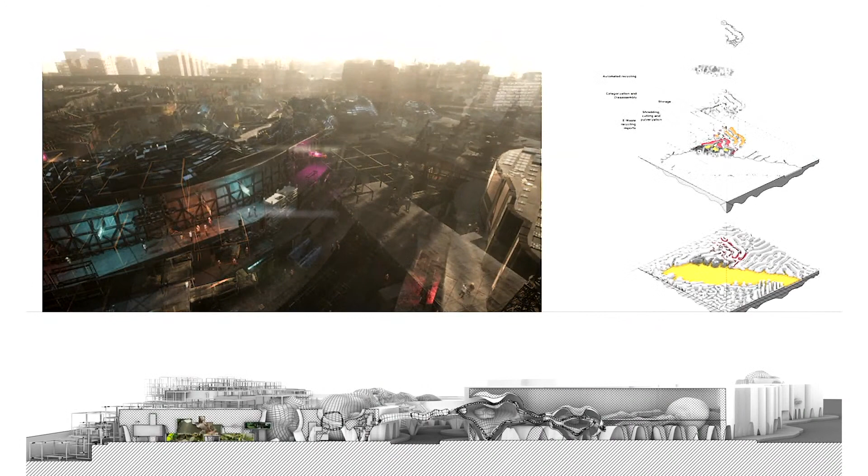Recycling factory: this diagram shows the process of e-waste recycling and the division of human labor and machine labor. After the automated importing process, recyclables are cut and disassembled by factory workers before they transport to their storages.

The transportation process is made by a combination of automated packaging vehicles that emerged an organic form inside the industry, residential areas, and storage. Storage buildings are a form of interlocking modules where the storing and transferring of materials are automated through the infrastructure.

Lithium-ion industry: by using the recycled material, the city will generate lithium-ion batteries. All the processes will be automated and interlocking to each other so that it will create a circular composition in order to work as one giant factory.

So our story is about a city as a machine, which follows the process of production, starting from recycling to the lithium-ion industry, where the whole process is under surveillance. Enjoy!

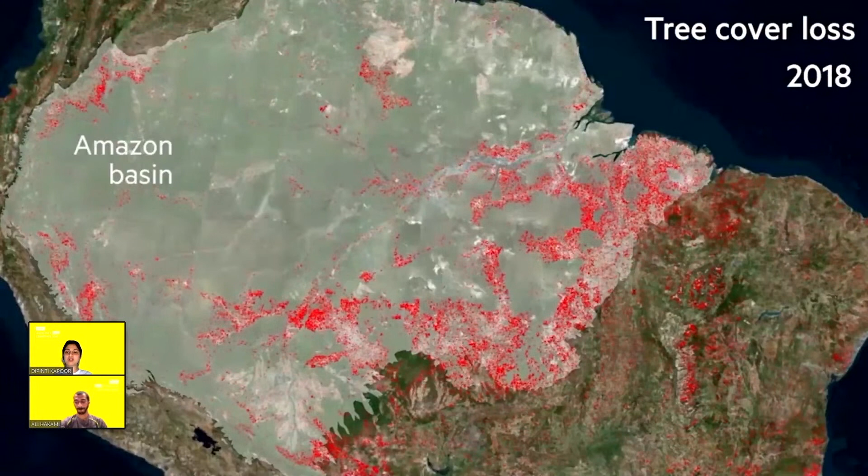The site is in the coastal city of São Luís, Brazil, strategically placed at the edge of the Amazonian River and the resource-rich Amazonian rainforest. This site lies adjacent to the landlocked lithium triangle of Argentina, Chile, and Bolivia, currently dominating 80 to 90% of the world's lithium production.

It is no news that the Amazonian rainforest has been suffering unfortunate depletion at the hands of our anthropogenic activities, most identifiable of these being the rampant deforestation that has reduced forest cover over 11,000 square kilometers in 2 years. That's roughly 8 times the size of Los Angeles.

Another major anthropogenic activity has been identified as mineral mining and refinement. Rich with resources, the place is vulnerable to increased mining and refinement activities and a consequent urban sprawl.

2050 is predicted to see a market shift to renewable energy consumption in the form of lithium-ion batteries produced for automotive, industrial, and portable needs.

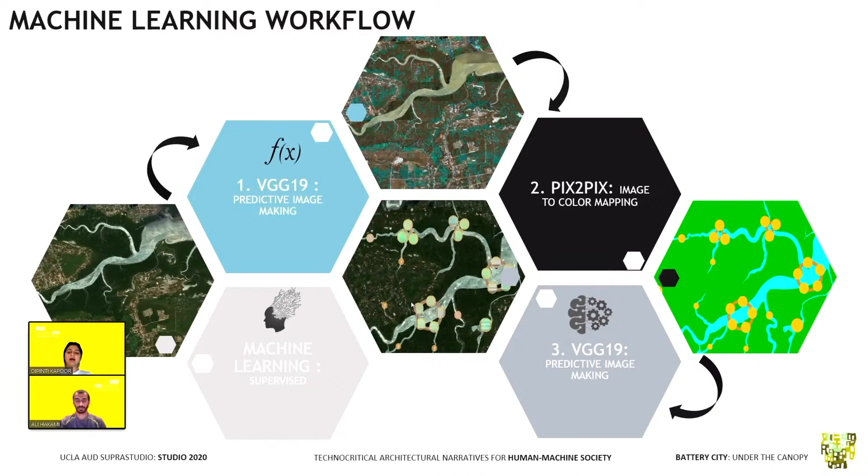To identify impending trends, we employ the use of machine learning algorithms such as VGG19, Pix2Pix, and CycleGAN. We elect a site and train it for an Anthropocene state. Over this, we overlay a grid of development through a scripted algorithm that allows us to generate this color map. We use this color map to further predict an urban sprawl on the site.

We identify deforestation and the inevitable industrial extraction and refinement on this site as our major design problems. Around this, we strategized a condition for reforestation while also capitalizing on the market demands. For this, we employed another layer of machine learning algorithm that allows us to redesign our forest through color codes.

In the image on the left is the map in its original state. This was later mapped to an intermediary state of reforestation and then the final state of reforestation with the vertical megacity towers. These are some zoom-ins of the current reforest and fully reforested sites.

A city that works as a machine within itself to meet the world's battery needs emerged in the city of São Luís, Brazil. We proposed a vertical expansion of an entire city sprawl through which emerged a megacity. This megacity is roughly 300 meters tall and 250 meters wide at the top.

It is layered in the following ways: evaporation at the top tier, collection, residential, refinement, manufacturing, and storage. The hierarchy of functions can be understood through their role in the tower.

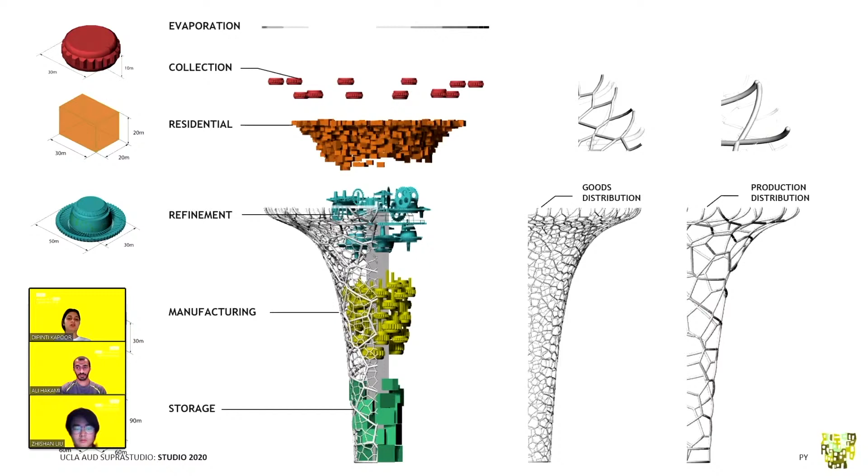Let us now take a look at the trailer of this megacity.